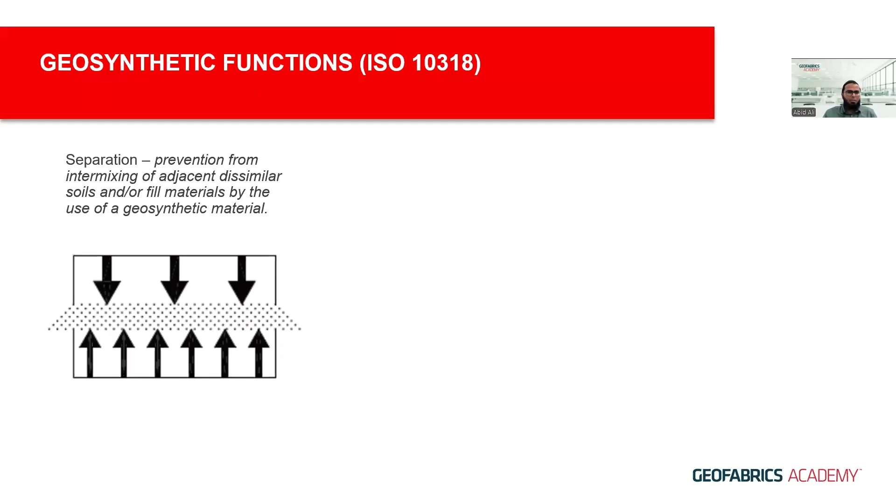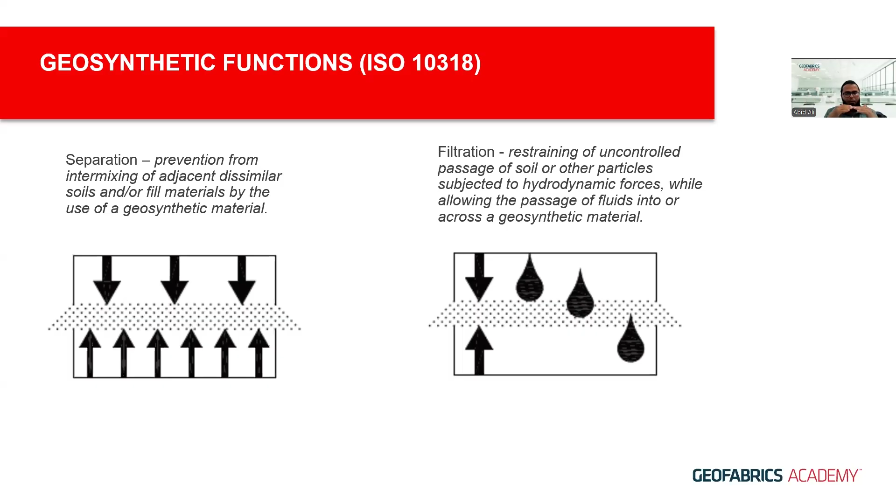Then we have filtration. In filtration, not only does separation come into play, but also the geosynthetic is required to prevent passage or loss of material from one layer to the other. The geosynthetic also protects or prevents any uncontrolled passage of material through it.

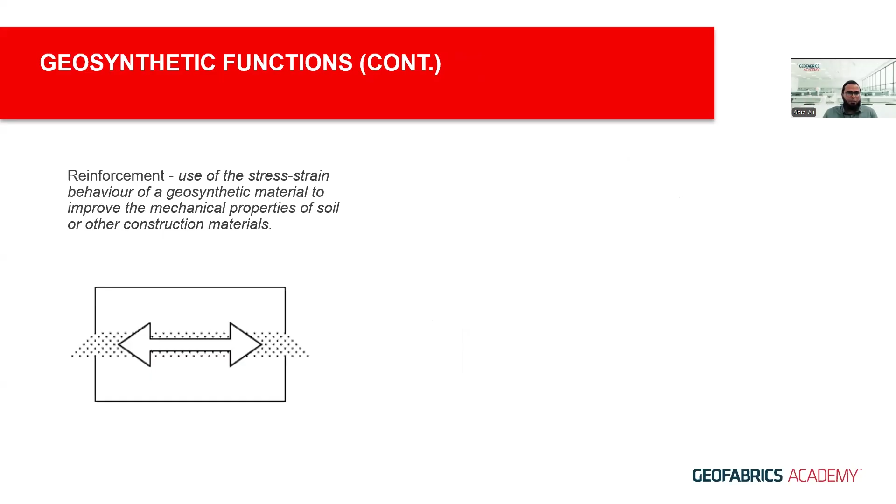Then we've got reinforcement, where the geosynthetic basically acts as a structural material, and provides benefit to the soil or the structure it is placed in. And then we have stabilization, where again the geosynthetic is adding structural benefit to the application it is used in.

In reinforcement, the tensile strength and stiffness are important, whereas that is not important in case of stabilization, because in stabilization the geosynthetic basically laterally confines the aggregate and improves the properties of the aggregate.

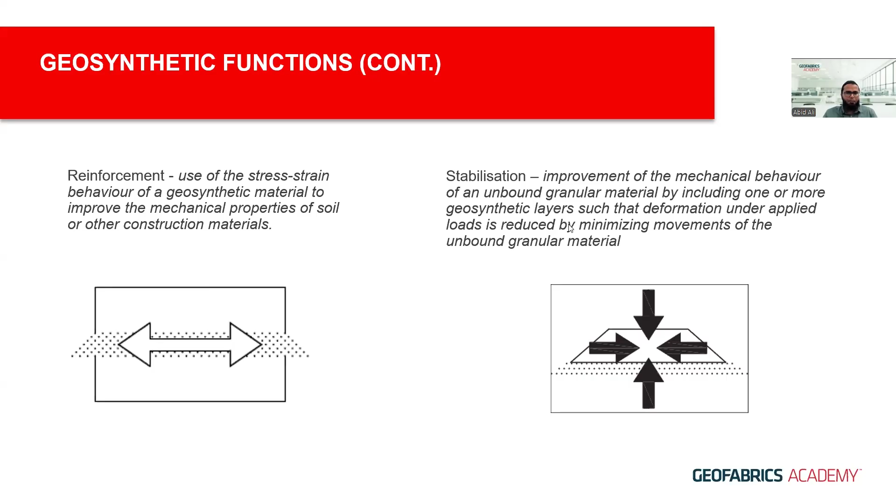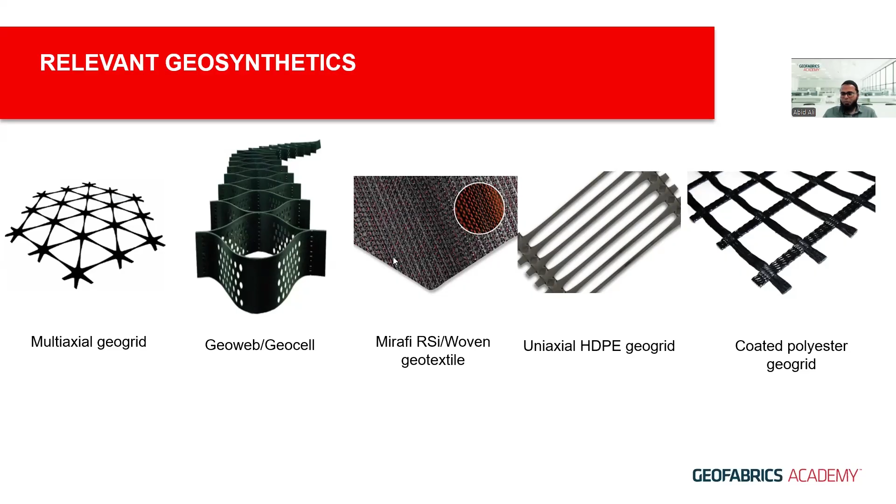Now let's look at relevant geosynthetics. In today's case studies, we will be seeing how these geosynthetics were used: multi-axial geogrid, GeoWeb or GeoCell, woven geotextile, uniaxial HDPE geogrid, and coated polyester geogrid. These geosynthetics were used in the case studies that I will be presenting now.

So let's look at the first case study. For a commercial development, two large culvert slabs were proposed. The dimensions are given here, so they're quite decently sized.

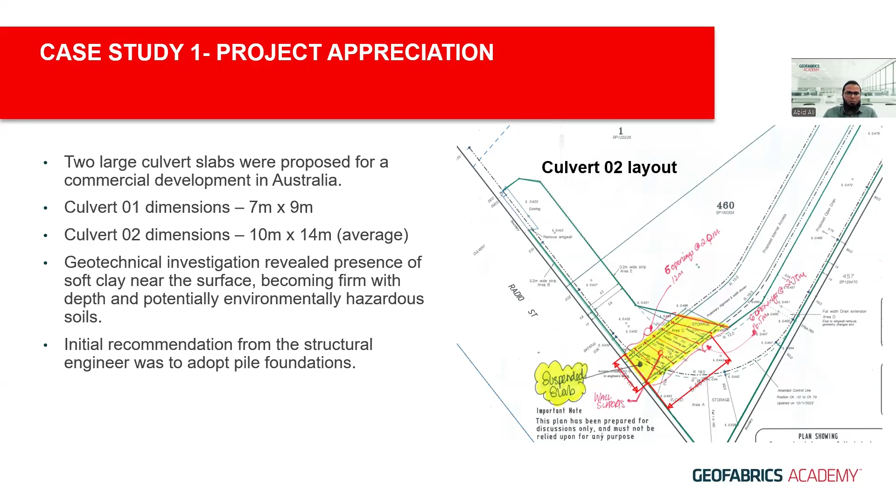Geotechnical investigation revealed presence of soft foundation and also potentially environmentally hazardous soils. So the initial recommendation was to adopt pile foundations due to the size of the structure and also due to poor ground conditions. But the client was keen on exploring an alternative solution using geosynthetics.

So we worked with the client's geotechnical engineer. They provided us with the ground model, and we did some initial numerical analysis to determine the bearing capacity of the ground without any platform and geosynthetics. The subgrade was obviously weak and it was not able to meet the required bearing capacity.

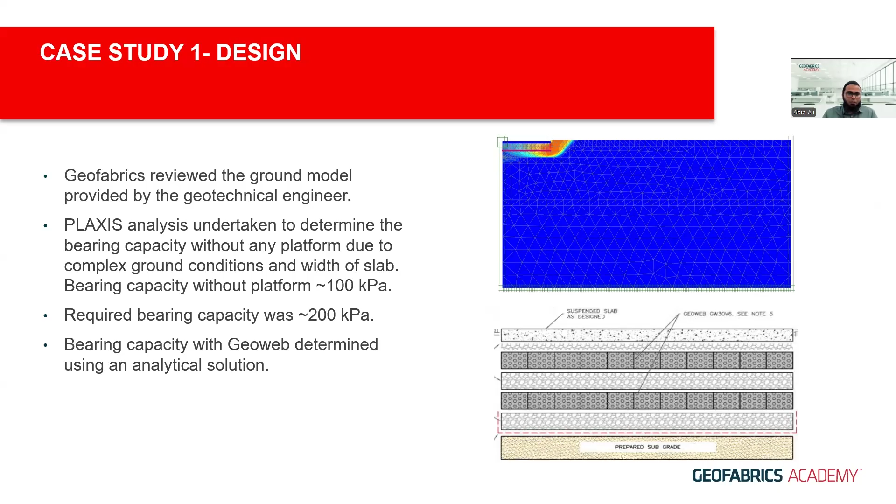So we worked with the supplier and we came up with a solution as shown here, where the bearing capacity was determined analytically, and we proposed this to the client. The total platform thickness was less than 10% of the largest slab width.

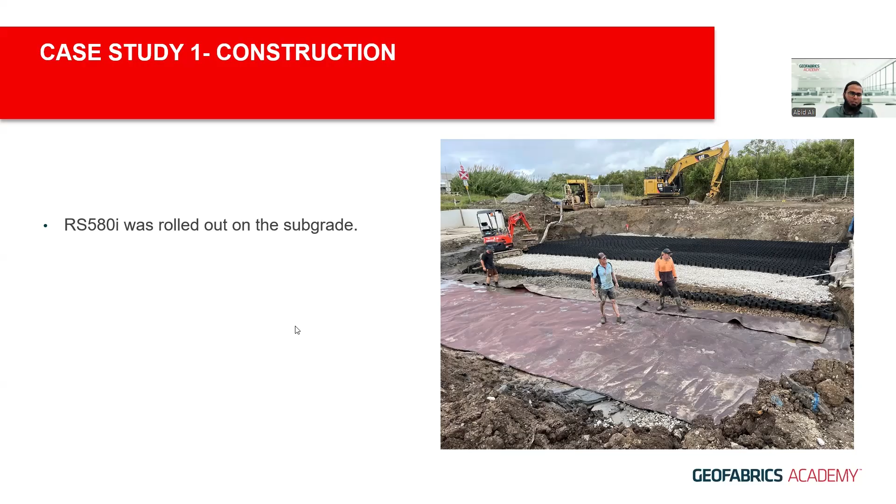So the construction was quite straightforward. The woven geotextile was placed on the subgrade first. This one provides separation, filtration, and reinforcement as well. It was placed directly on the subgrade, and then the base layer was constructed.

Then the first layer of GeoWeb was placed. Then an intermediate layer was placed, and then the second layer of GeoWeb was placed. The geosynthetics were extended 2 meters beyond the edge of the slab on either side.

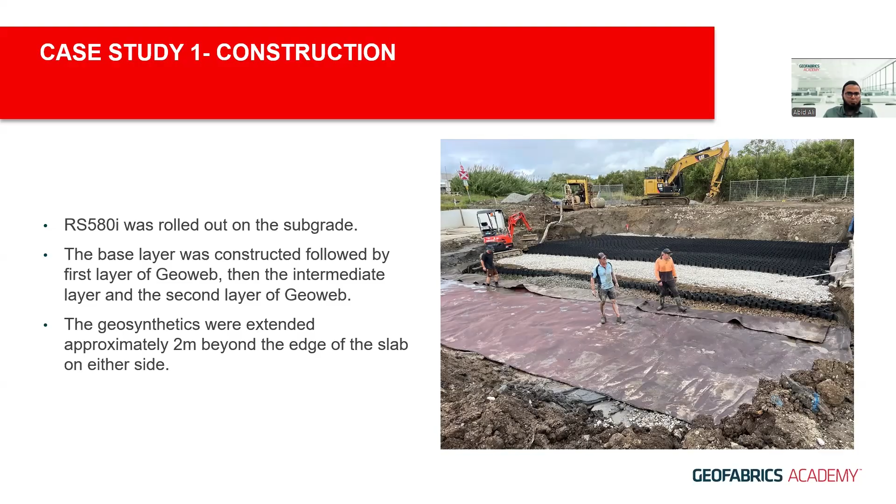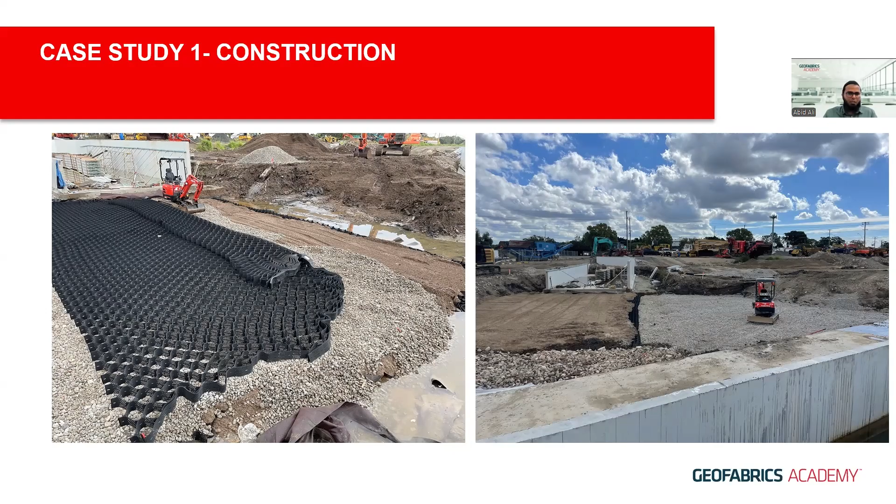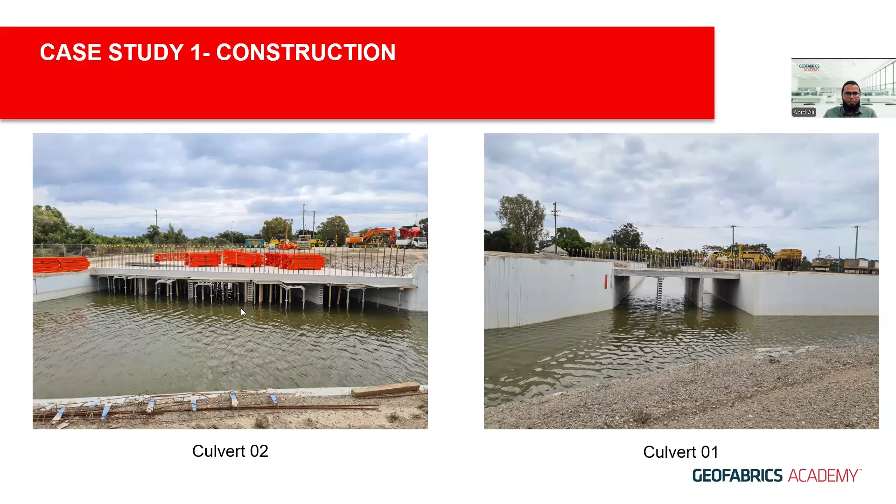Here are some more photos from the construction stage. Here we can see the GeoWeb being placed, and here you can see ponded water as well, so obviously the ground conditions are not quite favorable. And then here we see the photos after the construction of the concrete slab. The foundation is placed over here.

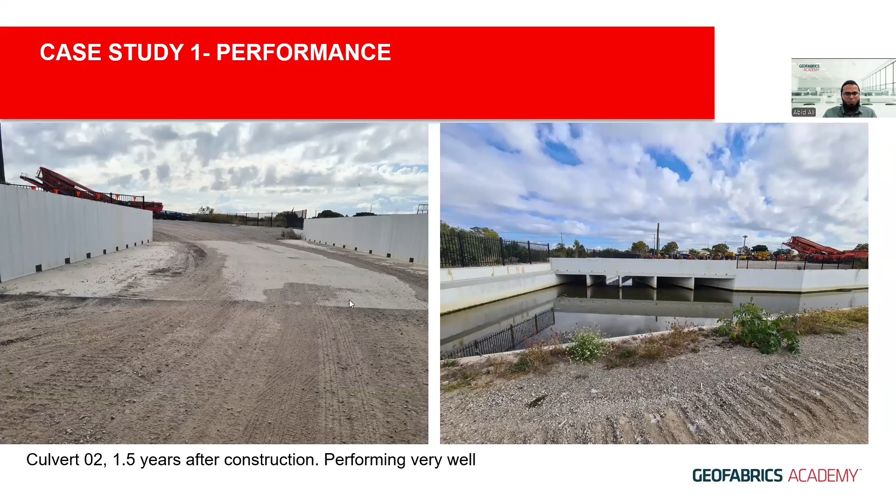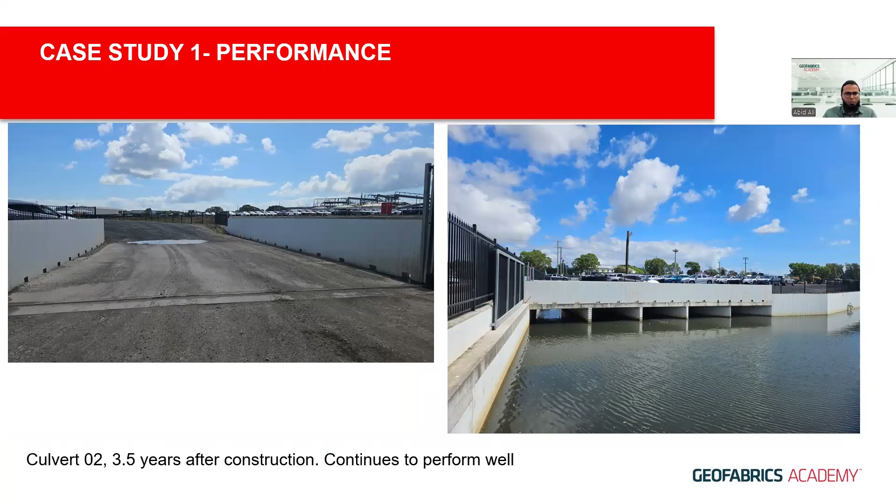We visited the site a year and a half after construction, and we noted that the culverts are performing quite well. These are the photos taken from that site visit for culvert 2, and these are the photos taken for culvert 1. We also visited the site just recently, nearly 3.5 years after construction, and the solution basically continues to perform well.

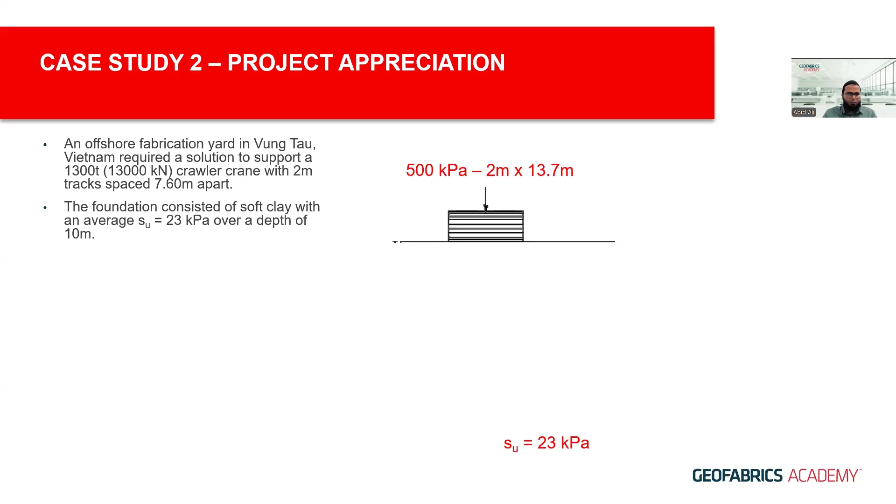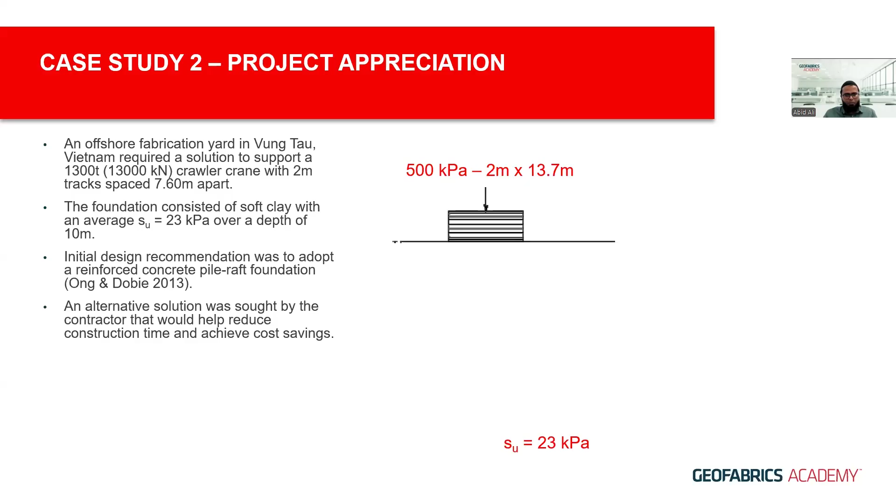The foundation consisted of soft clay with an average undrained shear strength of 23 kPa over a depth of 10 meters. The initial design recommendation was for a deep foundation solution. However, an alternative option was proposed to the client.

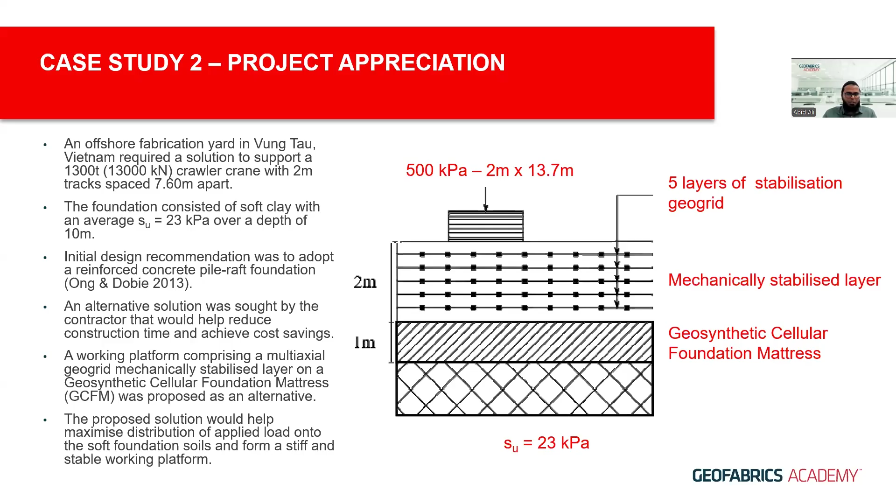As shown over here, it basically comprised a working platform with a combination of multi-axial geogrid to form a mechanically stabilized layer on the top, and then a geosynthetic cellular foundation mattress at the bottom. This solution was expected to help distribute the loads from the crawler crane more efficiently to the foundation and provide a safe surface for operation of the crawler crane.

The design was done to reduce the pressure at the base of the foundation mattress to an acceptable value, or in other words, to have some sort of a factor of safety against bearing capacity. The pressure at the base of the foundation mattress was calculated as 64.5 kPa, which gave a factor of safety of 2 for the bearing capacity.

The geogrid grade required to construct the cellular foundation mattress was calculated using an equation proposed in Jenner et al. Based on this, a suitable uniaxial geogrid, HDPE geogrid, was chosen to meet the required tensile strength of 33 kilonewtons per meter.

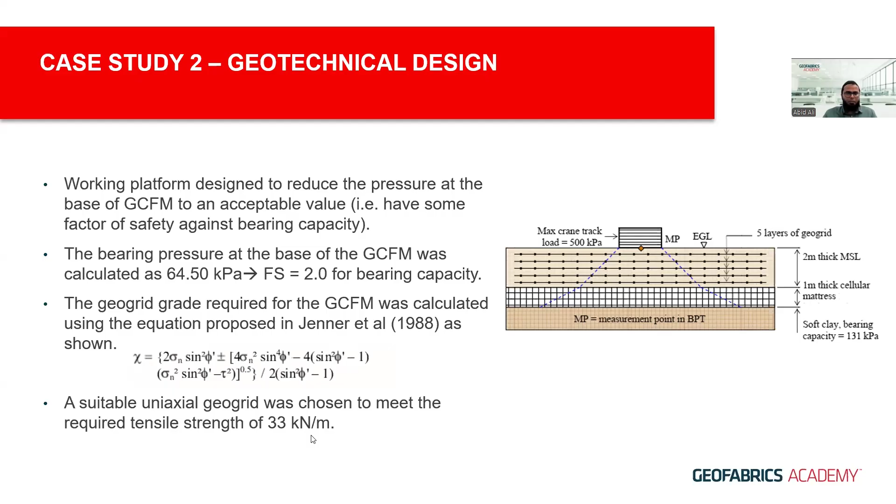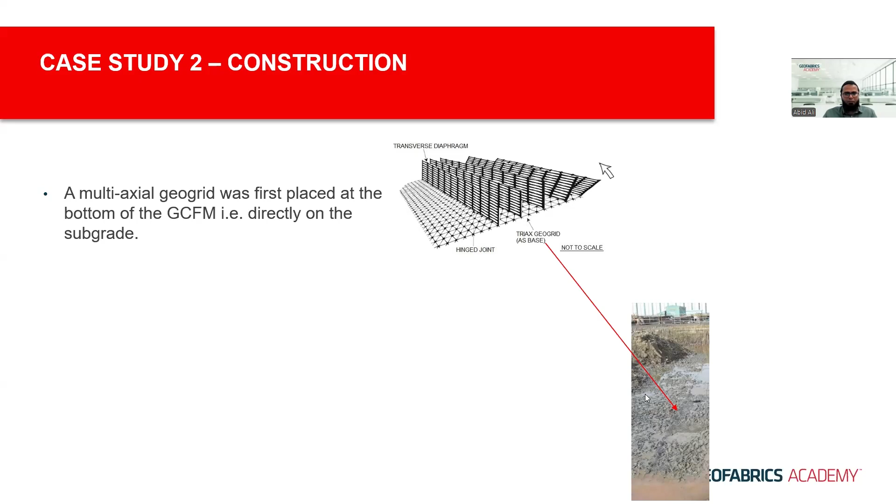In terms of construction, the multi-axial geogrid was first placed directly on the subgrade. Here's the photo from the site. Then the 1 meter high foundation mattress was fabricated on site using a combination of transverse and diagonal diaphragms or members made up of HDPE uniaxial geogrid to form closed cells, as we can see over here.

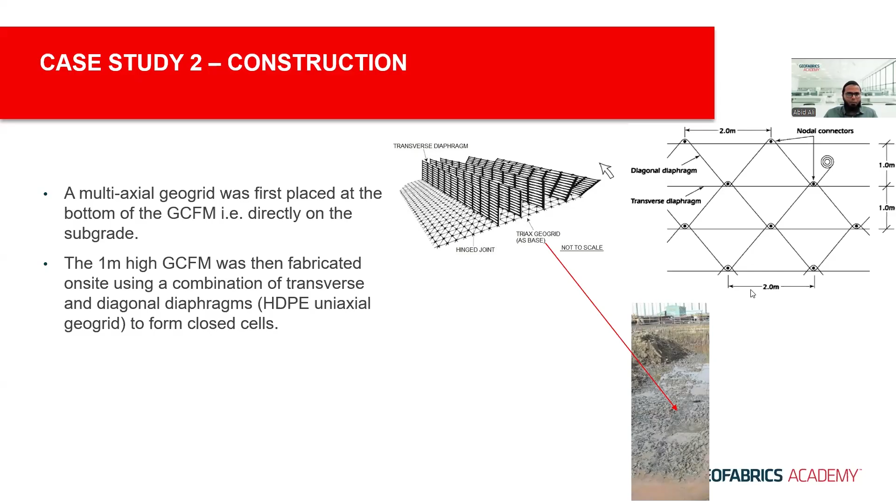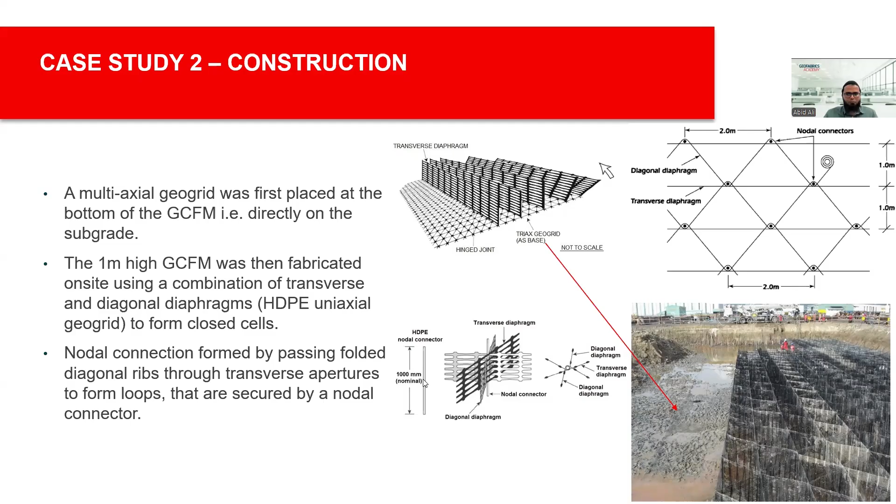The nodal connection was formed by passing folded diagonal ribs through the transverse apertures to form loops, and these were held in place by using a nodal connector. The cellular foundation mattress was filled in stages, as shown over here, with 75mm minus well-graded aggregate.

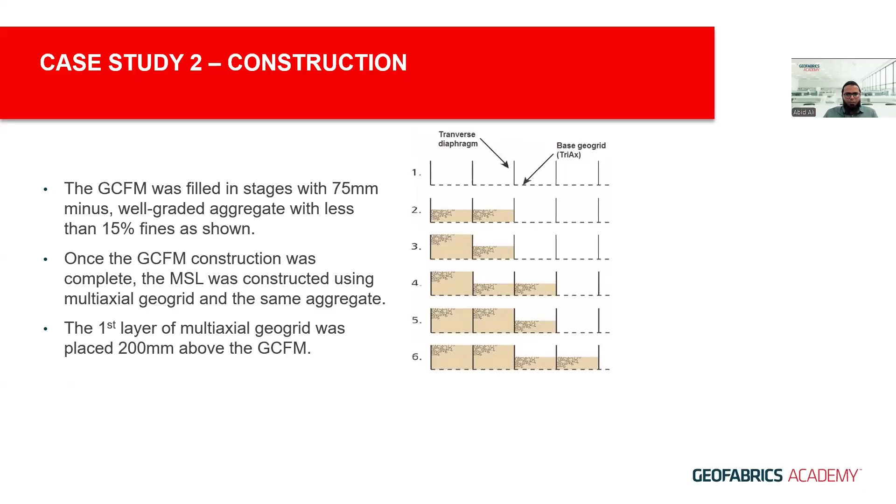Once the construction of the foundation mattress was complete, the MSL was constructed using multiple layers of multi-axial geogrid and the same aggregate. The first layer of the geogrid was placed 200mm above the foundation mattress, and then we had 4 layers 400 millimeters thick, and the topmost geogrid was placed 200 millimeters below the surface.

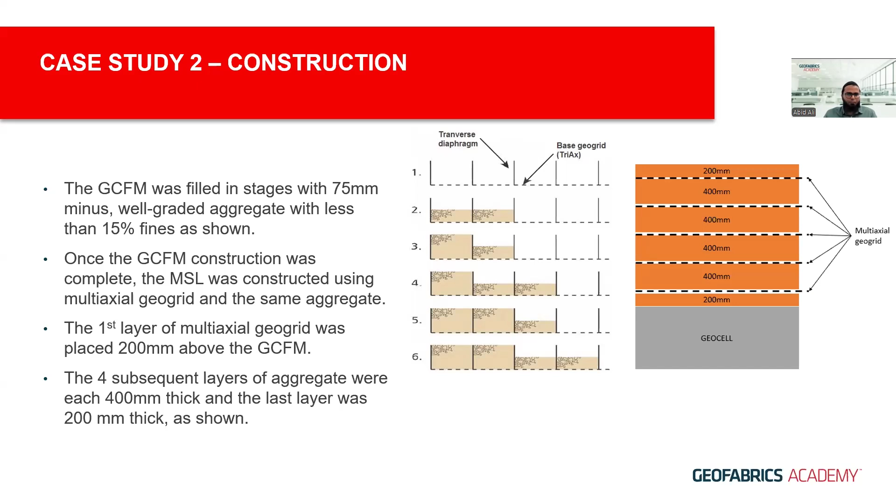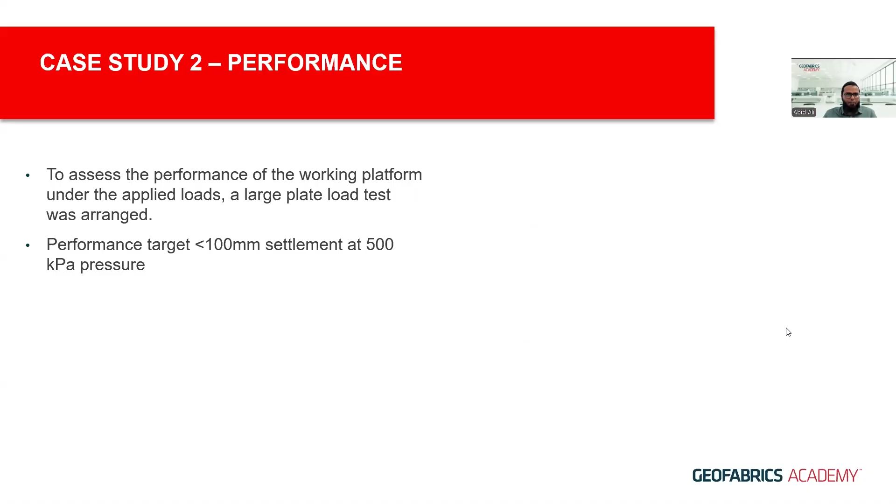To assess the performance of the working platform, a plate load test was undertaken, and the performance target was less than 100 millimeters at 500 kPa pressure.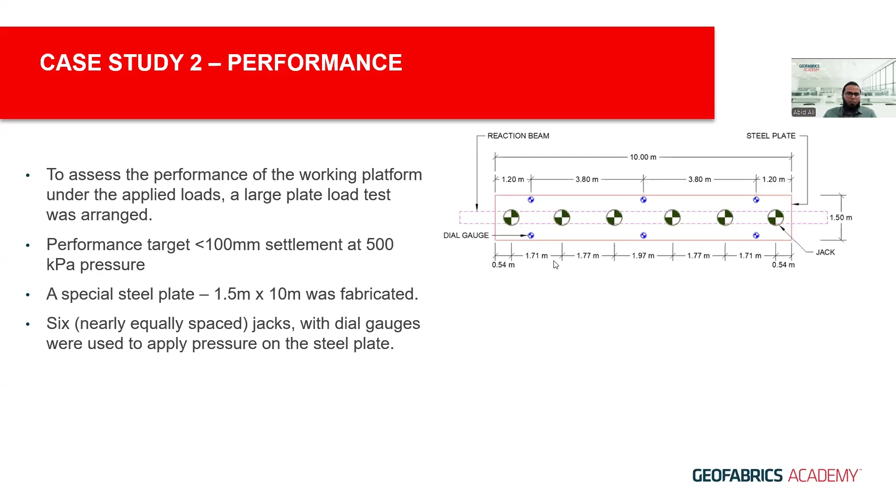A special steel plate was fabricated to carry out the plate load test, and pressure was applied using 6 jacks, which were nearly equally spaced, and there were 6 dial gauges as well to record the settlement of the plate. A crawler crane... wait, a kentledge of 1100 tons was used to provide the required reaction force for the jacks.

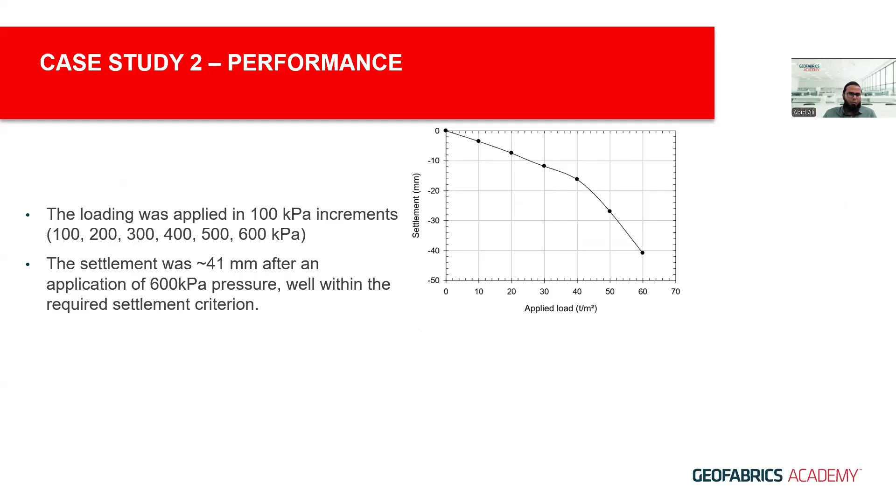So the loading was applied in 100 kPa increments, and the settlement after applying 600 kPa was around 41 millimeters, which was well within the required settlement criterion.

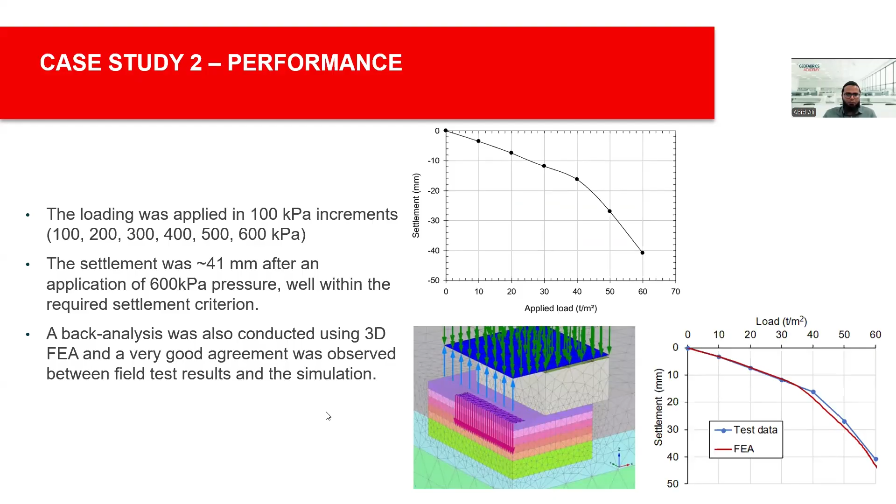Later on, a back analysis was also undertaken using 3D finite element analysis, and a very good agreement was obtained between the field test results and the numerical simulation.

Now let's look at the case study where only multi-axial geogrids were used for a working platform. This is for a petrochemical facility in Southwest Louisiana, where this ringer crane was proposed.

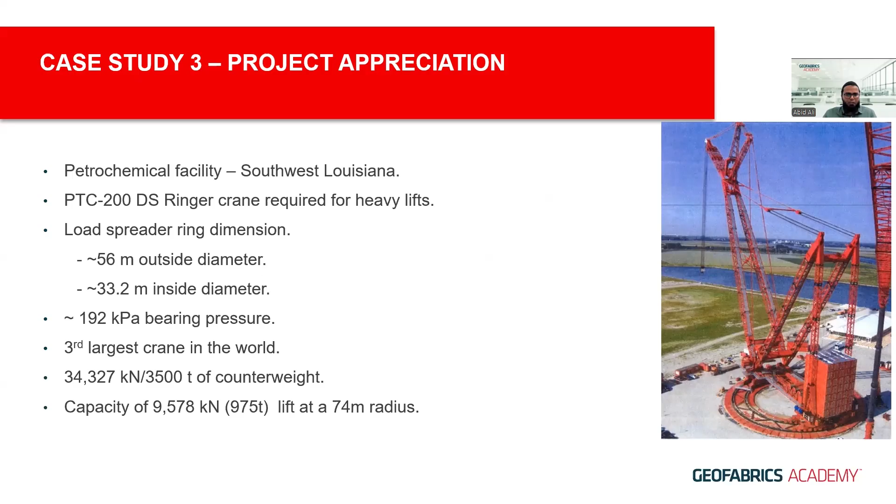This ringer crane had pretty massive dimensions. It had a 56-meter outside diameter and 33.2 meter inside diameter, and it imposed a pressure of 192 kPa over its footprint. It was the third largest crane in the world, with 3,500 tons of counterweight and a capacity of undertaking lifts of 975 tons at a 74-meter radius.

It was also used for undertaking 62 heavy lifts, including a 688-ton wash tower.

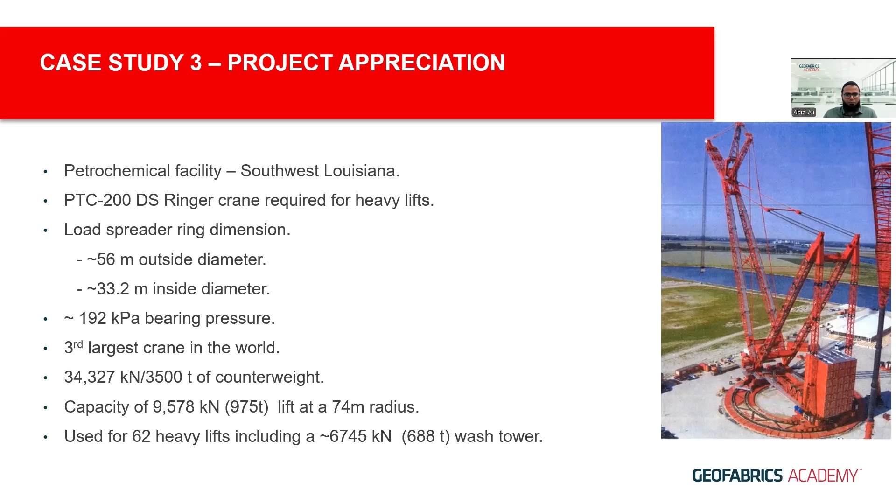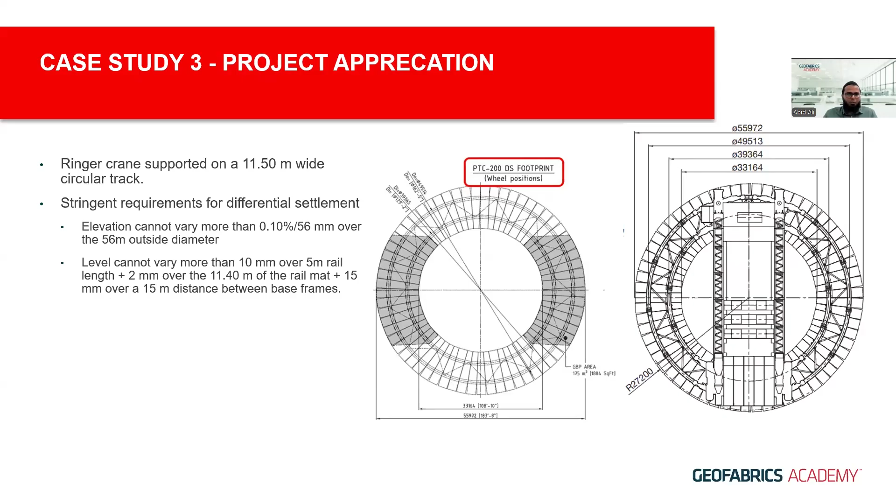The ringer crane was supported on an 11.5-meter wide circular track, as we can see. There were stringent requirements for differential settlement - the variation over the outside diameter should not be more than 0.1%.

Site investigation comprised one borehole to a depth of 30.5 meters, indicating high plasticity clays over nearly half the investigation depth. The groundwater table was also shallow, between 1.2 to 1.8 meters, and undrained triaxial tests on samples indicated shear strength of 32 to 79 kPa, increasing with depth.

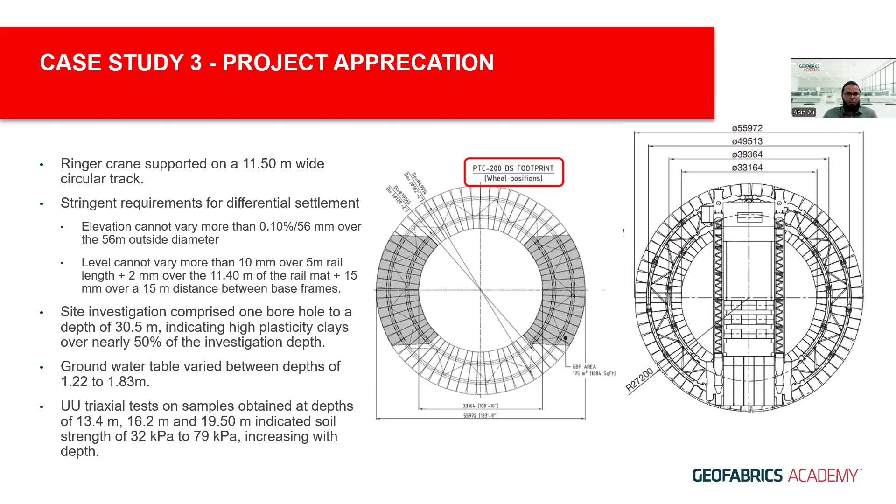For this particular crane, the original design comprised 200 concrete piles to 20 meters, a 61-meter pile cap, and construction cost of 2.7 million US dollars, demolition cost of 0.6 million US dollars, and total cost of 3.3 million US dollars.

Now, the parameters for the alternative design were a bearing pressure of 295 kPa, subgrade stiffness of 6.5 kg per cm cube, and differential settlement should be less than 1 in 100.

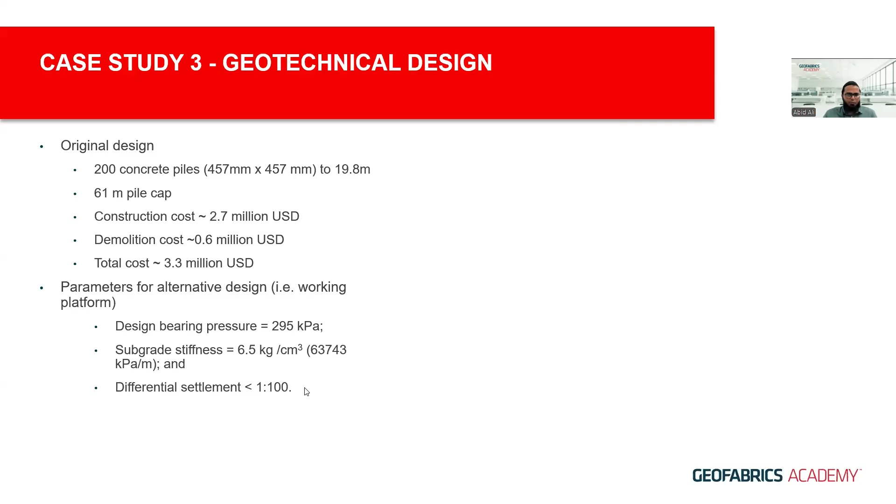So an alternative design comprising a mechanically stabilized working platform with 5 layers of multi-axial geogrid was proposed. This working platform was 17.5 meters wide and 1.83 meters thick.

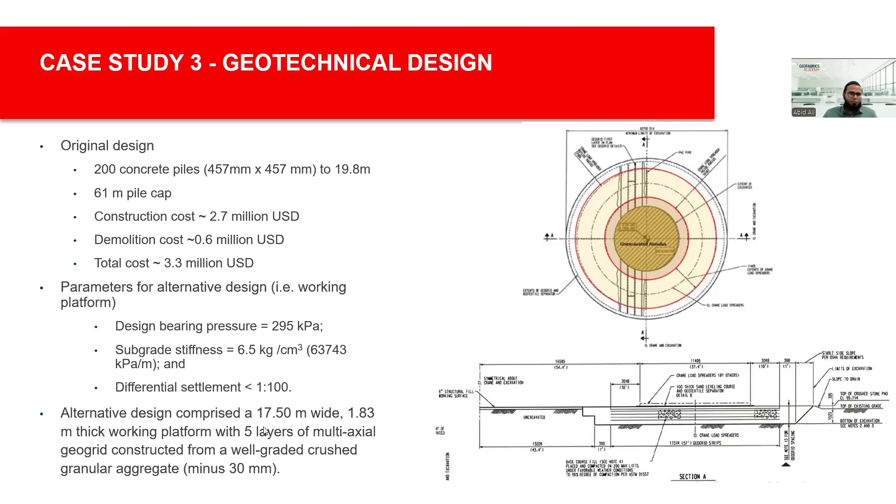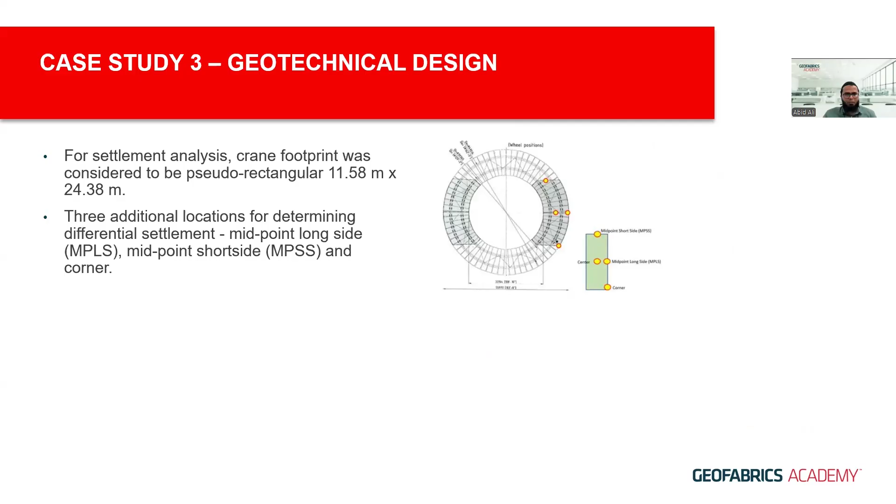For settlement analysis, the crane footprint was considered to be pseudo-rectangular, as shown, and 3 additional locations were considered for determining the differential, which basically helped in assessing the differential settlement: the midpoint along the long side, the midpoint along the short side, and then the corner.

Based on the information available, we calculated the average differential settlement, and it was less than 0.5%. A non-stabilized aggregate of the same thickness as the platform would have had 36% greater overall settlement and 44% higher differential settlement.

The actual settlement during crane operation was expected to be much lower, and the reason for that was because the crane would be operational only for a short period of time compared to the time required for primary consolidation settlement.

To construct this working platform, the subgrade was proof rolled. Any soft spots were over-excavated and replaced and compacted.

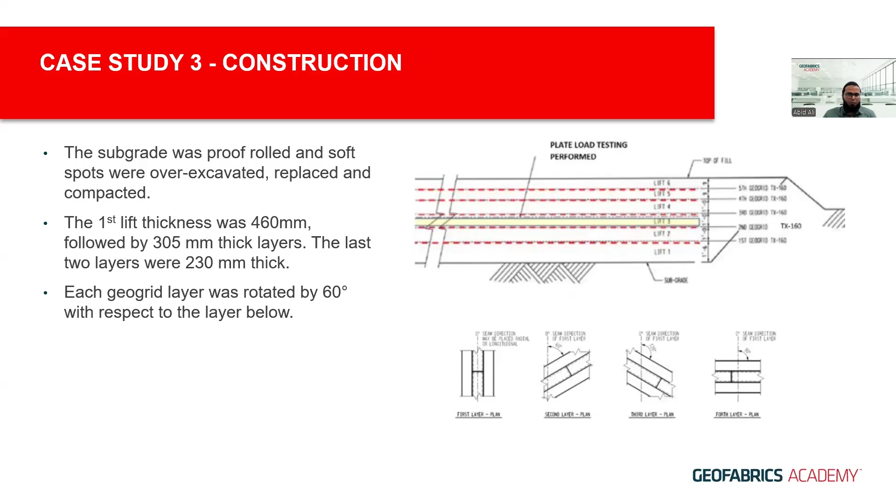The first lift thickness was 460 millimeters, after which the first layer of geogrid was placed. Then there were 3 layers of 305 millimeters, and the last 2 layers were 230 millimeters. Each geogrid layer was rotated by 60 degrees with respect to the layer below, as shown.

A plate load test was conducted on lift 3 to determine the subgrade support, using a 457 millimeter plate with loads gradually increased to 550 kPa.

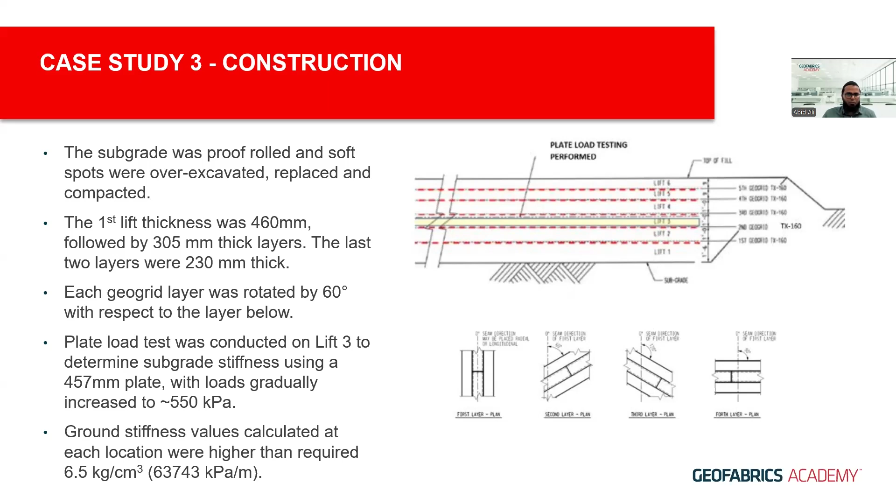And the ground stiffness values were higher than what was required.

An aggressive drainage system was also designed for the working platform to keep it well drained. For the sake of brevity, I have not presented that, but a lot of detail has been given about the drainage system.

And once the crane had been set up, the site was hit by Hurricane Harvey. After the hurricane had passed, the crane could resume the lifts the very next day, due to the benefit of a very good drainage system and also due to the mechanically stabilized working platform.

This photo basically shows the ringer crane lifting a 100-meter high wash tower, which weighs around 688 tons, soon after the hurricane had passed the site.

It just goes on to show how well the platform was performing. The observed differential settlements were much lower than what was stipulated.

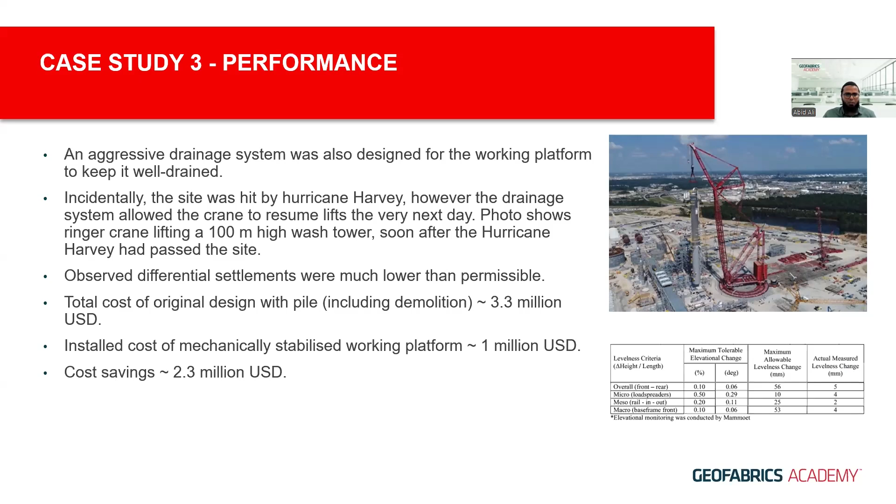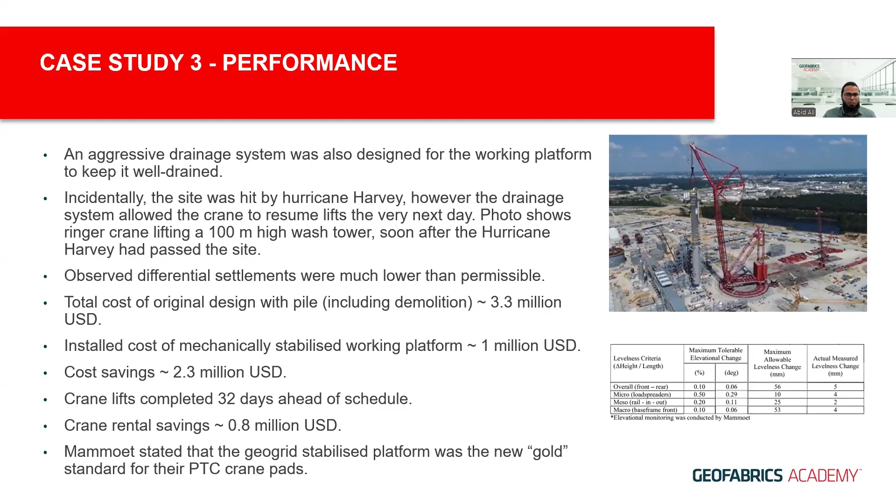The initial cost of the pile foundation was around $3.3 million. Installed cost of the mechanically stabilized working platform was $1 million, giving a cost saving of $2.3 million. Crane lifts were completed 32 days ahead of schedule, which helped the client save some additional money. Mammoet stated that the geogrid stabilized platform was a new standard for the crane pads.

Now let's look at a case study where geogrids were used for a shallow foundation for a large storage tank. This case study is from Canada, where 2 large diameter storage tanks were proposed on the south side of Hamilton Harbor in Ontario, Canada. This site is basically reclaimed land.

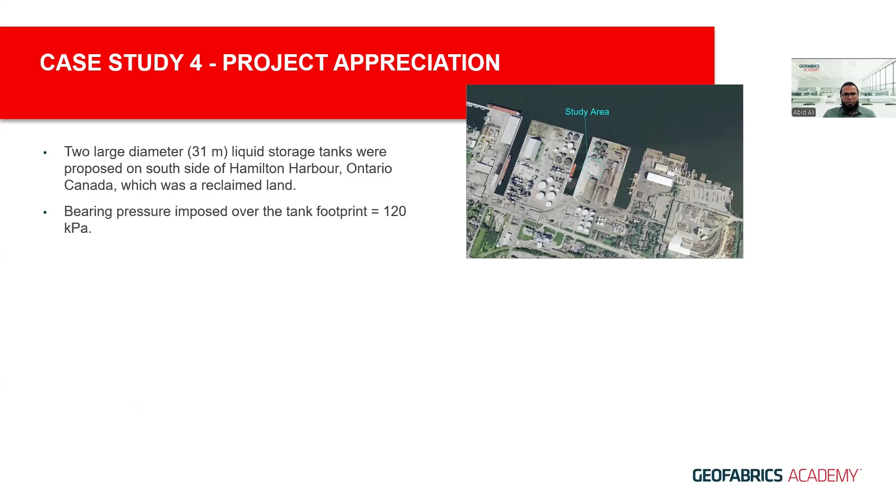The bearing pressure over the tank footprint was around 120 kPa. Geotechnical investigation on the site revealed presence of medium dense fill near the surface, up to approximately 2 meters depth. Under that, there were very loose sandy silt and silty sand with very low SPT blows, underlain by silty clay clayey silt which became firm with depth. Bedrock was at a depth of 26 meters. This profile is taken from one of the boreholes during the site investigation.

Due to poor ground conditions near the surface, intensity of loading, and the footprint of the tank, initial designs called for either end-bearing piles or ground improvement using stone columns. Due to the high cost associated with these solutions, the owner was inclined towards a shallow foundation solution.

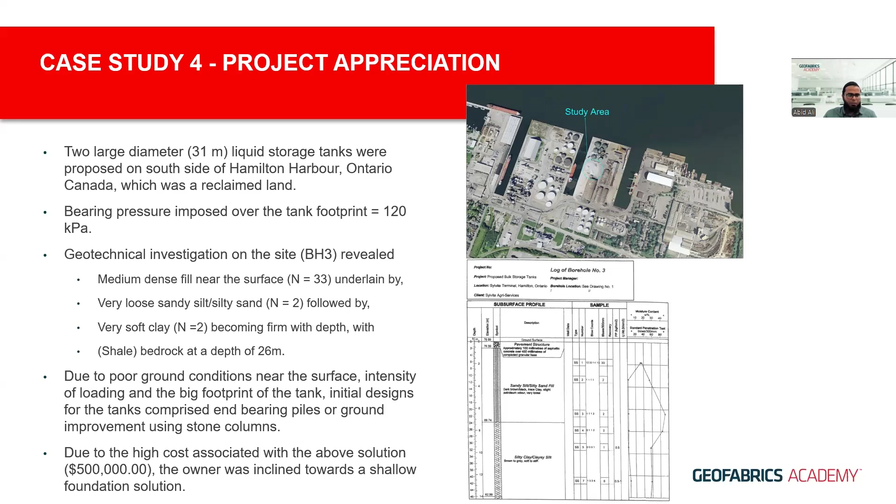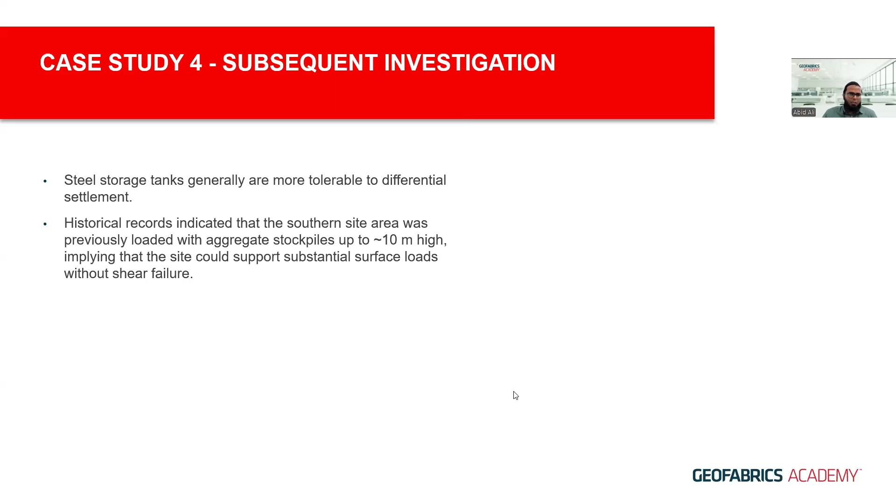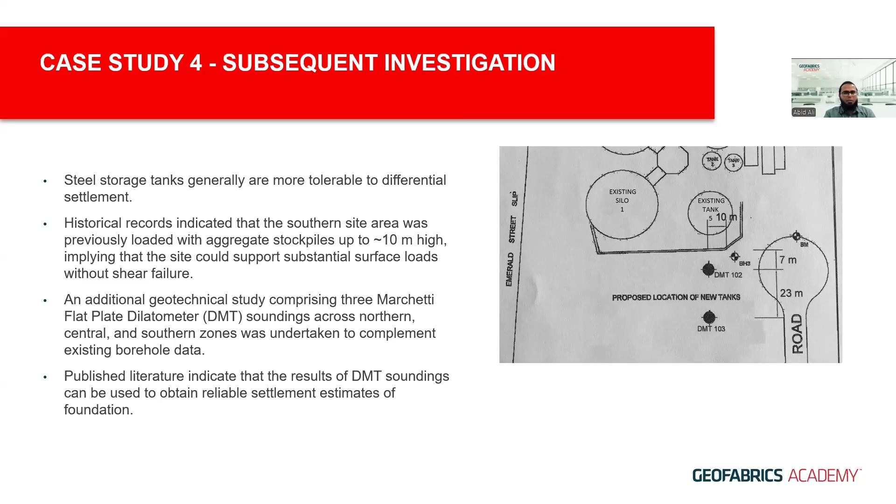Steel storage tanks are quite tolerant to differential settlement, and historical records indicated that the southern portion of the site was loaded with large aggregate stockpiles up to 10 meters high, which indicated that the site can support substantial surface loads without shear failure. An additional geotechnical investigation was undertaken to supplement the available borehole data, and 3 DMT soundings were carried out over the site, with literature indicating that the results of DMT soundings can be used to obtain reliable settlement estimates.

Settlement analysis was undertaken using numerical tools and verified using hand calculations. The constrained modulus obtained from DMT was considered for settlement analysis carried out using numerical tools. The settlement obtained was around 55 millimeters at the south, which was possibly preloaded, 130 millimeters at the tank center, and 80 mm towards the northern end of the tank.

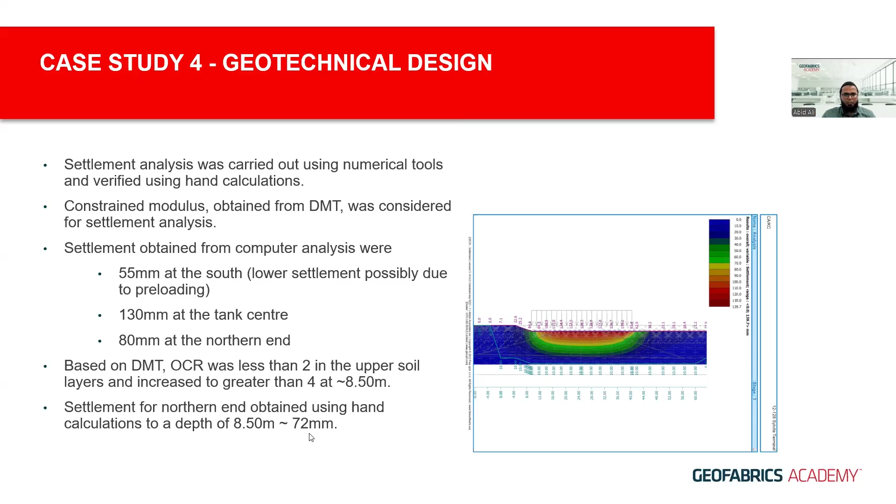The DMT soundings indicated that the OCR was less than 2 in the upper 8.5 meters, and beyond that it increased to more than 4. So for settlement analysis purposes, only the top 8.5 meters was considered, and for the northern end, hand calculations indicated a settlement of 72 millimeters.

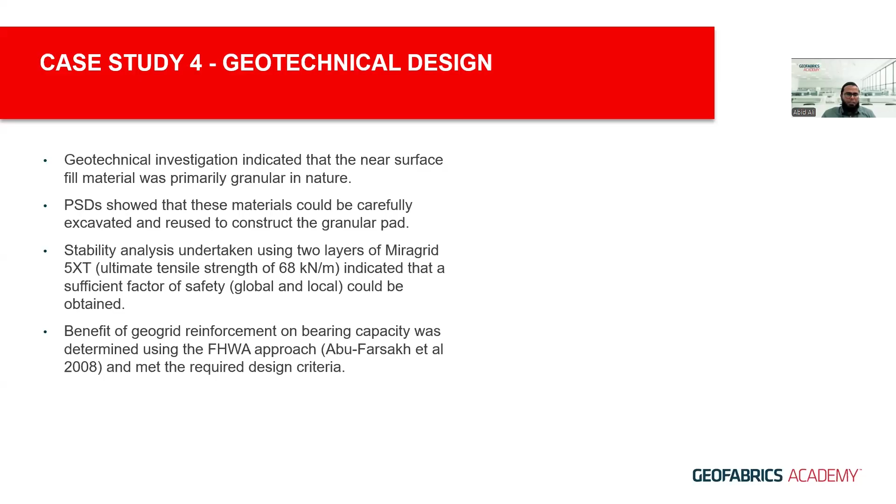Geotechnical investigation also indicated that the fill near the surface was granular in nature, and tests on that material showed that it could, if carefully excavated, be reused to construct the granular pad. Stability analysis was undertaken using 2 layers of Miragrid 5XT, and that indicated the required factor of safety could be achieved. The benefit of geogrid reinforcement on bearing capacity was determined using the FHWA approach, and that met the required design criteria.

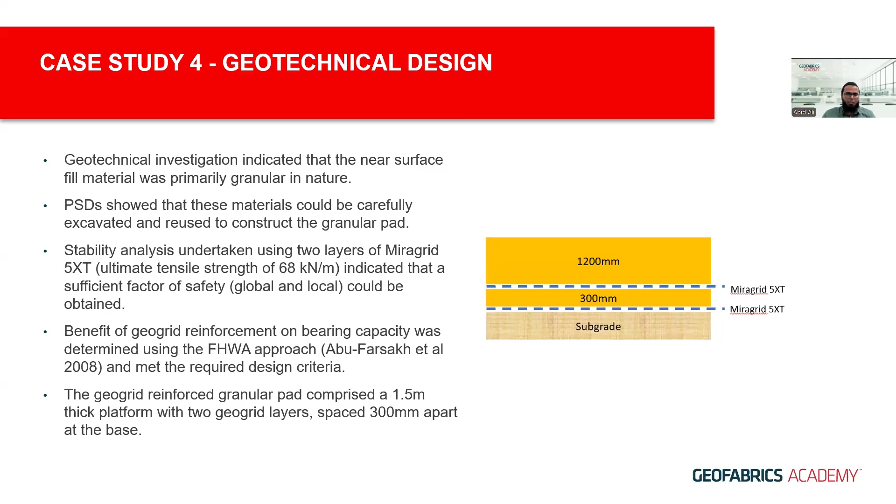The geogrid reinforced pad comprised a 1.5 meter thick platform with 2 layers of Miragrid 5XT, a coated polyester geogrid. The geogrids were placed at the bottom of the pad and spaced 300 millimeters apart.

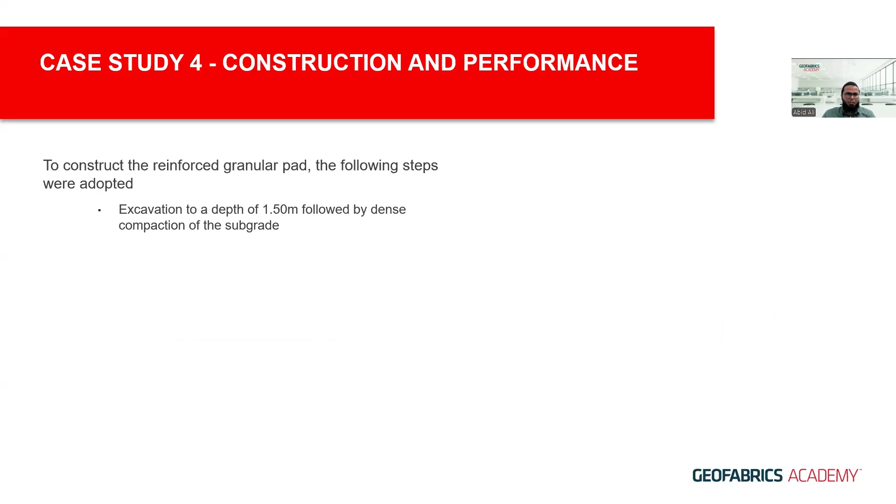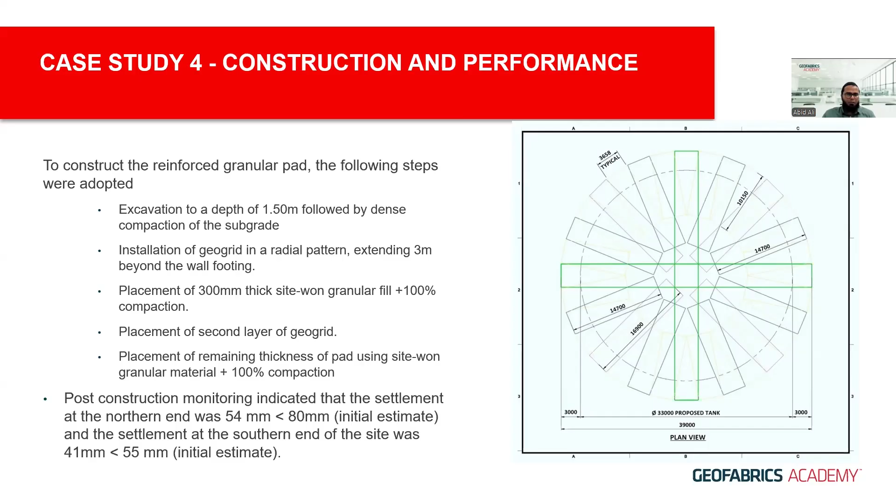Post-construction monitoring indicated that the settlement at the northern end was less than initially estimated: 54 millimeters compared to the 80 millimeters initially estimated. At the southern end it was around 41 millimeters, less than the 55 millimeters initially estimated. These numbers were taken a year after monitoring the site for settlement.

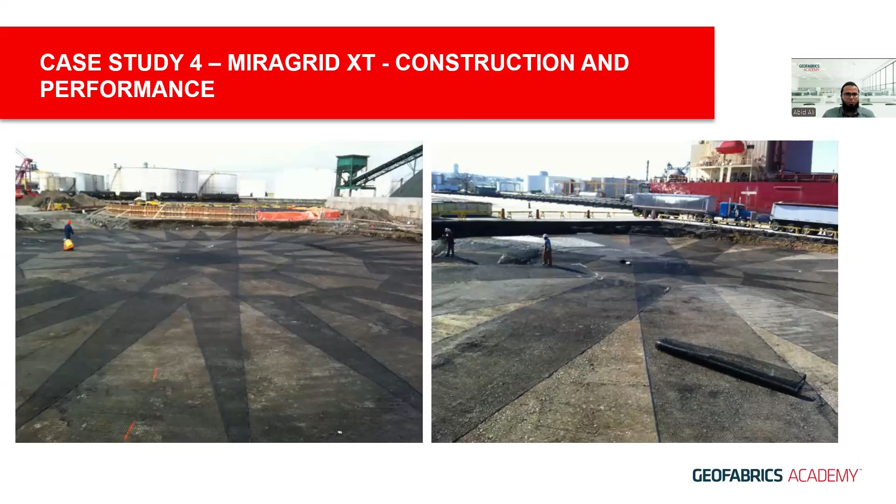And here are some photos showing the placement of the geogrid and the construction of the granular pad.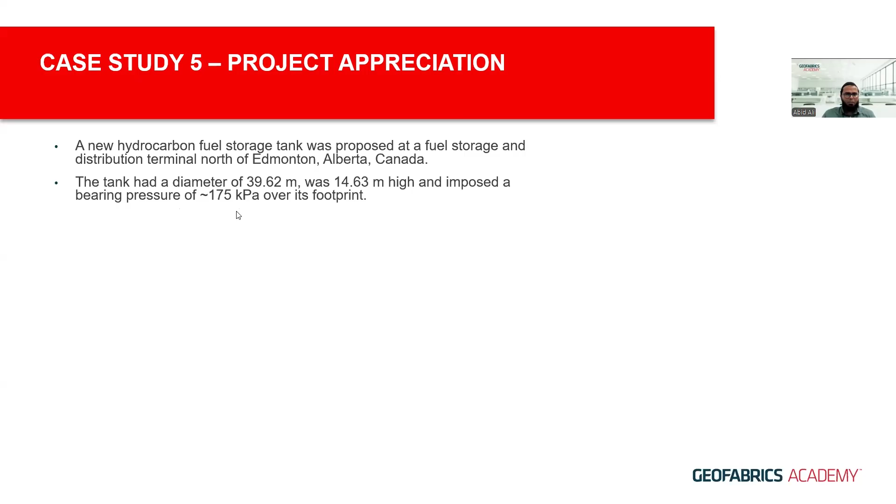And this brings me to the last case study, another large storage tank, also in Canada. But this time the tank had a slightly larger diameter of around 40 meters, and it imposed a pressure of 175 kPa over its footprint, so much higher pressure.

The geotechnical investigation indicated presence of organic topsoil near the surface, and soft mixed lacustrine clay to a depth of 6.1 meters. This was underlain by silty sandy clay to depths greater than 15 meters, with a 3-meter thick band of wet silty sand layer at 7.5 meters. Groundwater was observed at a shallow depth of around 2.6 to 3.5 meters.

Due to the presence of poor ground conditions and high water table, end bearing piles would have to be at least 10 meters deep. The site owner wanted a cost-effective solution and decided to proceed with a geosynthetic reinforced foundation instead.

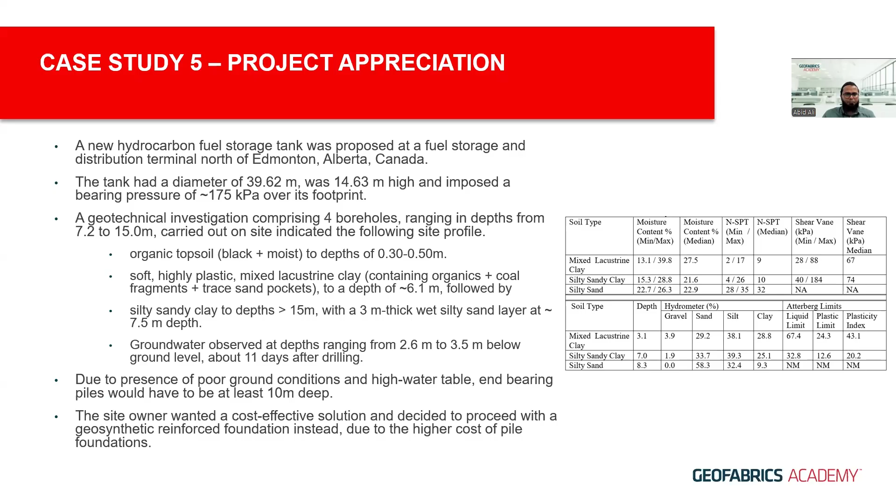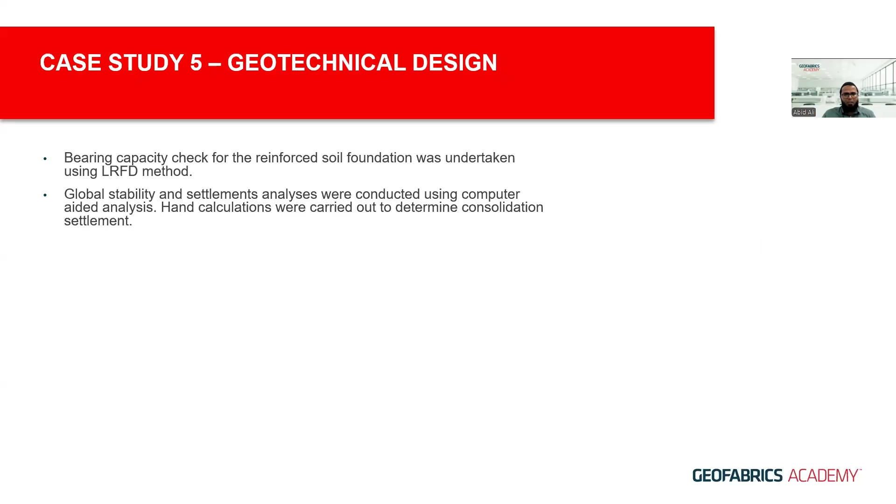The factor of safety for global stability was around 1.8, and the maximum settlement at the center of the tank was around 150 millimeters. Out of this, 129 millimeters was in the top soft clay layer.

During construction of the tank, its perimeter was divided into 14 survey stations. Station 1 was located at 355 degrees with respect to north, and the subsequent stations were numbered clockwise. The distance between two stations was approximately 8.9 meters. These stations served as reference points for monitoring the total and differential settlement of the tank.

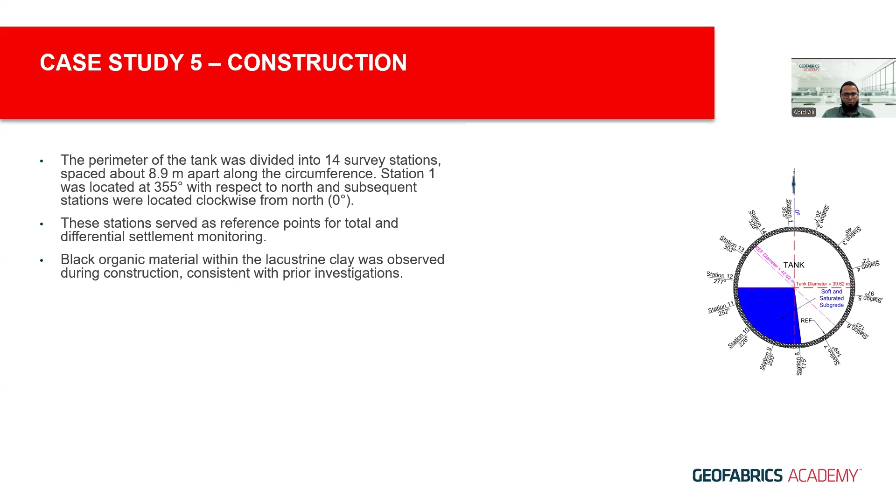During construction, black organic material within the lacustrine clay was observed, which was as expected. They also came across a soft saturated subgrade zone between stations 9 to 12.

This area was remediated by over-excavating 3 meters, then filling 2 meters of granular material uncompacted, and then placing additional granular fill and clay layer, which were then compacted to form the subgrade in this portion.

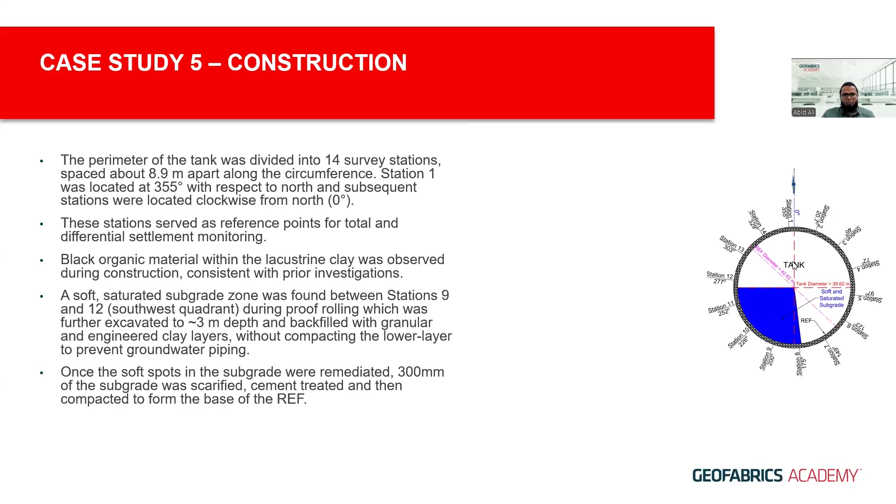Once the soft spot was remediated, the top 300 millimeters of the exposed surface was cement treated to form the base of the REF. A 3-meter thick reinforced earth foundation was constructed using 8 layers of Mirafi RS580i at 375 millimeters apart, with each layer placed perpendicular to the layer below.

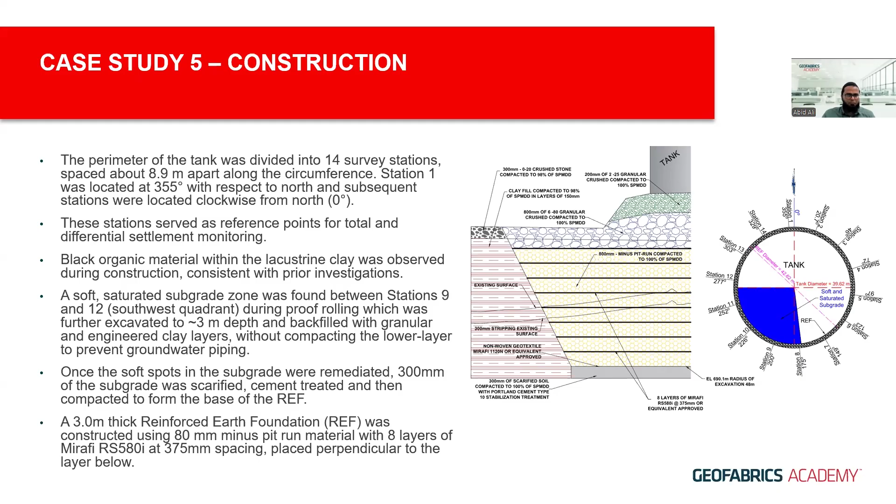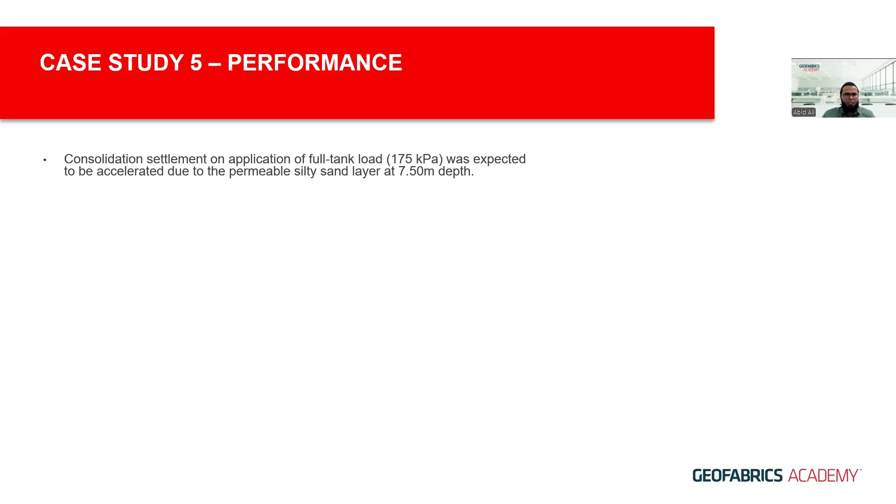After the tank was constructed, a load test was also carried out, but it was expected, due to the presence of the permeable silty sand layer at 7.5-meter depth, that the consolidation settlement would occur quickly.

The tank was filled in stages over 12 days and surveyed as per API 650 guidelines. After construction of the reinforced earth foundation and prior to loading, the total settlements varied between 34 to 70 millimeters along the stations, and there was a differential settlement of 13 millimeters, which is quite reasonable.

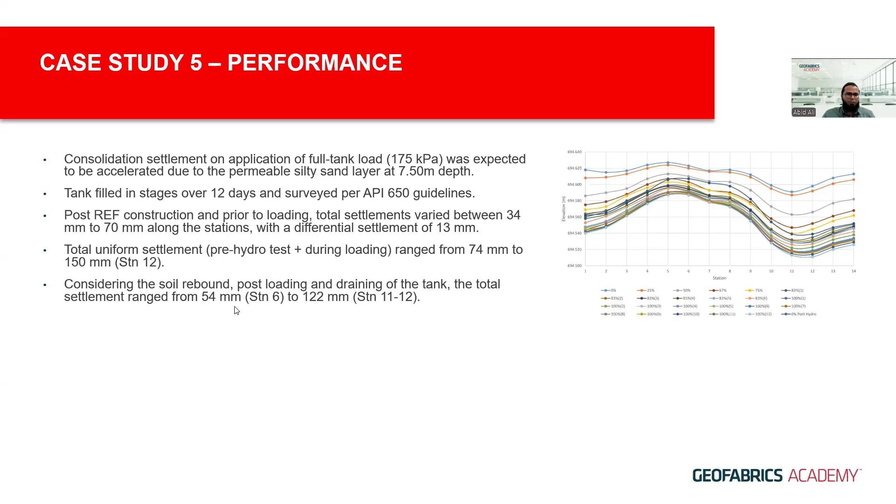Once the tank was loaded, the settlement increased to 74 to 150 millimeters, and when it was unloaded, there was some rebound, and the total settlement decreased, varying from 54 to 122 millimeters. The maximum differential settlement after the hydro test was 15 millimeters, which was slightly above the API guidelines, but it was considered acceptable for this particular project.

Between stations 9 to 12, there was greater settlement, and that was due to the uncompacted lower backfill in the remediated section. Some stations experienced reduced settlements, and that was due to the compaction caused by repeated truck loading along the access ramps for constructing the REF.

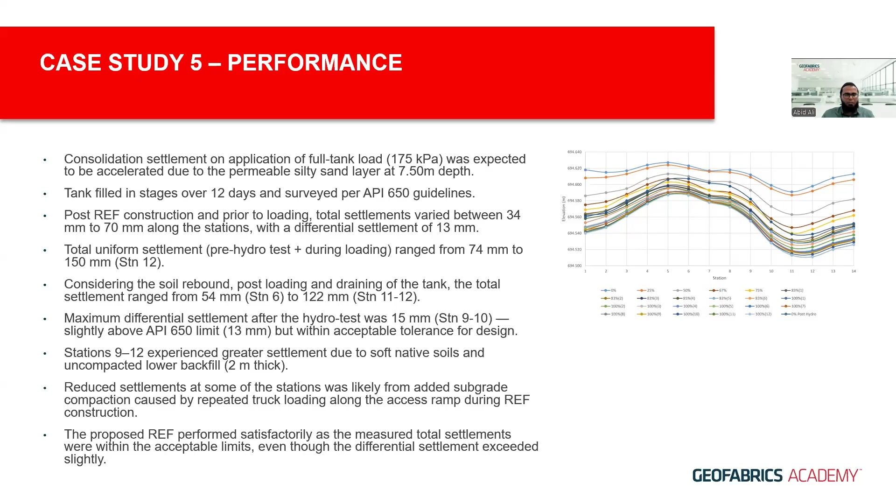Overall, the REF performed satisfactorily, as the measured settlements were considered acceptable, although the differential settlement exceeded the allowable value slightly, but it was still considered acceptable for this particular project.

So these case studies basically demonstrate that by using geosynthetics, a cost-effective solution can be achieved compared to more traditional approaches. And in using a particular geosynthetic type, it is important to understand how it performs so that its benefit can be accounted for properly in the design. A proper geotechnical investigation and understanding of ground conditions is a must.

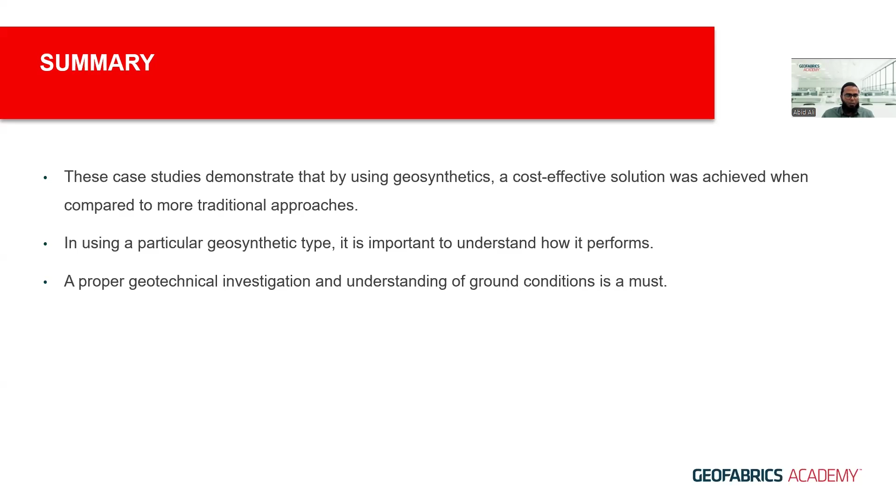Without a proper understanding of the ground, it will be difficult to come up with a very good design.

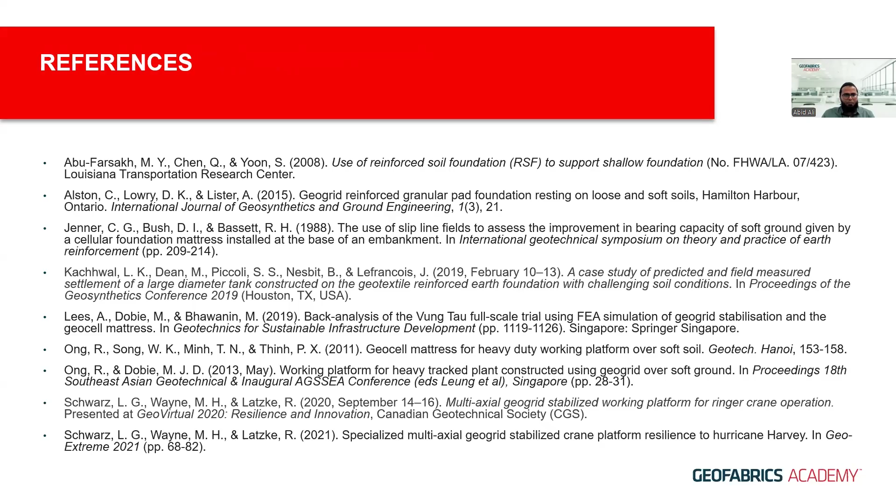How do you assess the impact of groundwater table on the application and adjust the design as required, if any? Well, the simple thing is that if you're talking about this impact on the platform, the platform will have some reduced bearing capacity due to the presence of the groundwater table, and that will have to be adjusted or accounted for in the design.